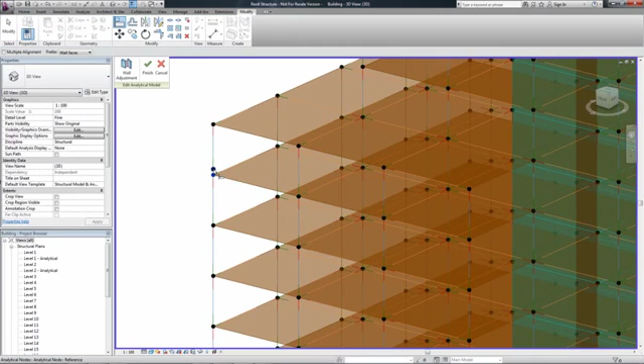Revit Structure helps to extend the BIM process to analysis by enabling interoperability with Autodesk Robot Structural Analysis Professional, as well as third-party analysis tools, to allow designers and engineers to perform structural analysis.

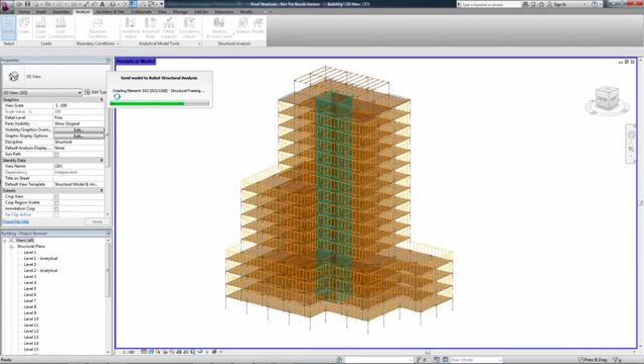The advanced link offered by Autodesk between Revit Structure and Robot Structural Analysis Professional is a fully bidirectional link. This link streamlines structural engineering workflows by facilitating the coordination of design documentation with structural analytical design information.

In this example, we will assume that a structural designer has created a design model ready for analysis in Revit Structure. The model can be sent directly to Robot Structural Analysis Professional with all the information needed for structural analysis, including boundary conditions and loads.

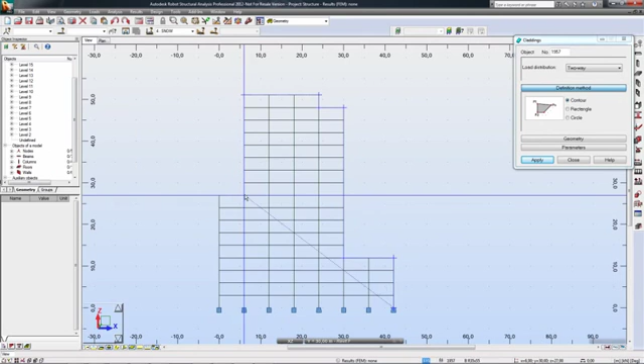Once the model has been linked to Robot Structural Analysis Professional, the engineer can begin the analysis and code design process. After an initial analysis, the engineer may want to make some changes to the analytical model based on calculated results.

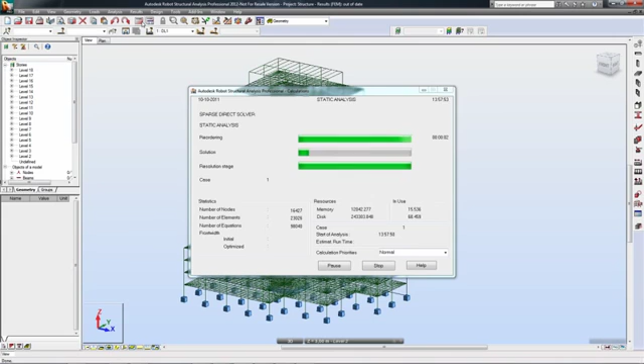In some cases, the engineer may also decide to make changes to the model prior to initial analysis based on his or her engineering experience and knowledge.

Once the analysis has been conducted, the engineer can easily explore all results and start the design of structural elements. Using Robot Structural Analysis Professional, the engineer can also run code checking to verify and design concrete, steel, and timber elements based on a wide variety of national and international codes.

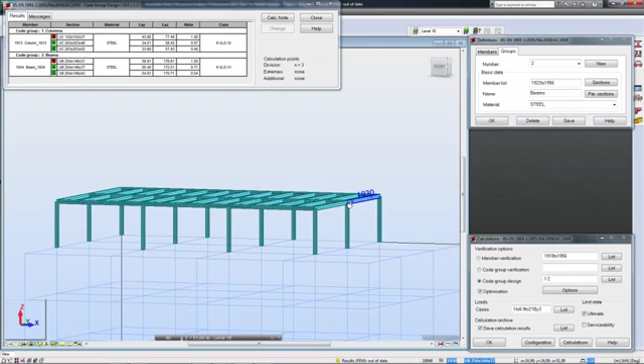Once design changes and the analysis have been completed, the information needs to be brought back into Revit Structure to allow the designer to review the design changes from the analysis and code checking phase and update the physical model accordingly. In Revit Structure, via the bidirectional link with Robot Structural Analysis Professional, a designer can review, accept, or even reject the engineer's proposals.

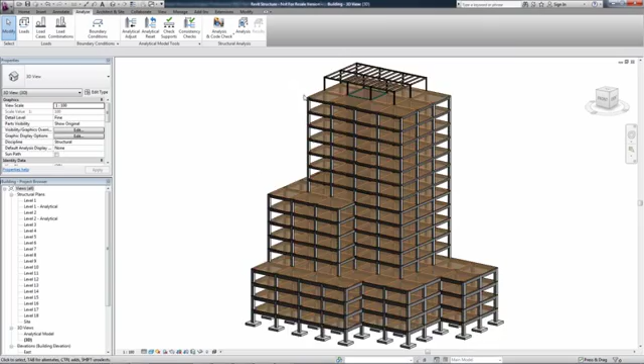Proposals represented in the analytical model, or even suggest another solution, while keeping in mind the engineer's suggestions. All changes to cross-sections and materials can be viewed in the physical model as well.

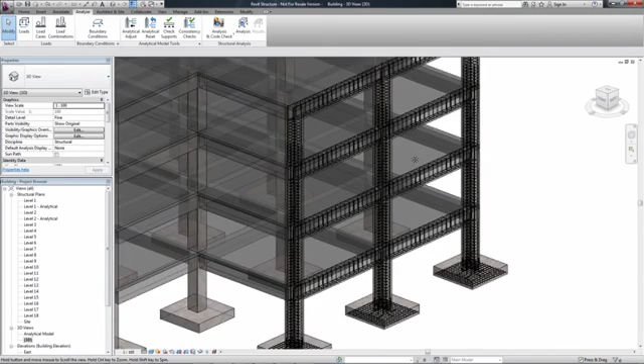A diverse range of results and structural parameters, including reinforcement for concrete structural elements, can be brought from Robot Structural Analysis Professional to Revit Structure. This reinforcement gives design intent to the designer about how concrete elements should be reinforced.

Since the structural design process is iterative, there may be the need to send the structural model to the analysis software for recalculation after further design changes are made.

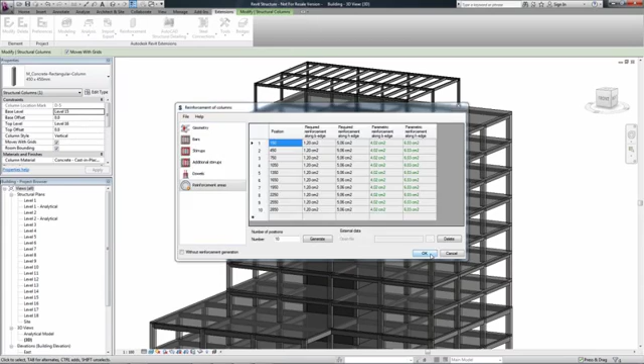Another benefit of the bidirectional link between Revit Structure and Robot Structural Analysis Professional is that after the designer transfers the model again to Robot Structural Analysis, all changes are maintained.

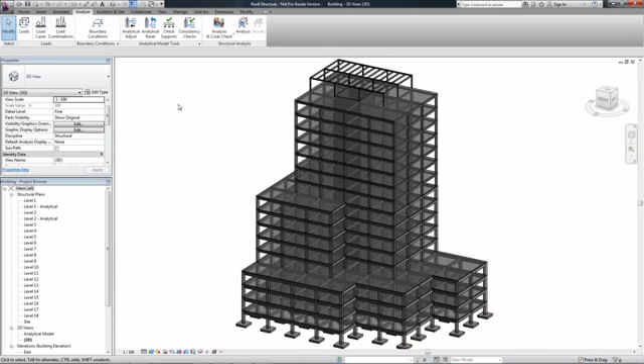As you can see, information such as meshing parameters and additional loads is preserved during this iterative process. This is an important aspect because the link mechanism preserves this analysis-centric data and ensures complete integration and preservation of data across multiple links of Revit and Robot.

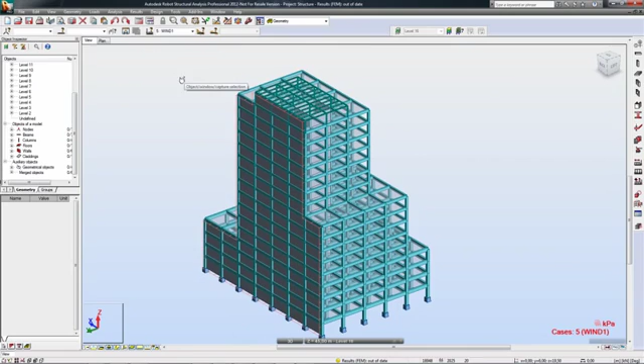And now an engineer can perform analysis and design once again. The link between Revit Structure and Robot Structural Analysis Professional supports the iterative design process and exchange of data between designers and engineers, enhancing collaboration between them, and further demonstrates the value of building information modeling to structural engineers.

The link helps integrate analysis into the building information modeling process and support structural designers and engineers' workflow needs.